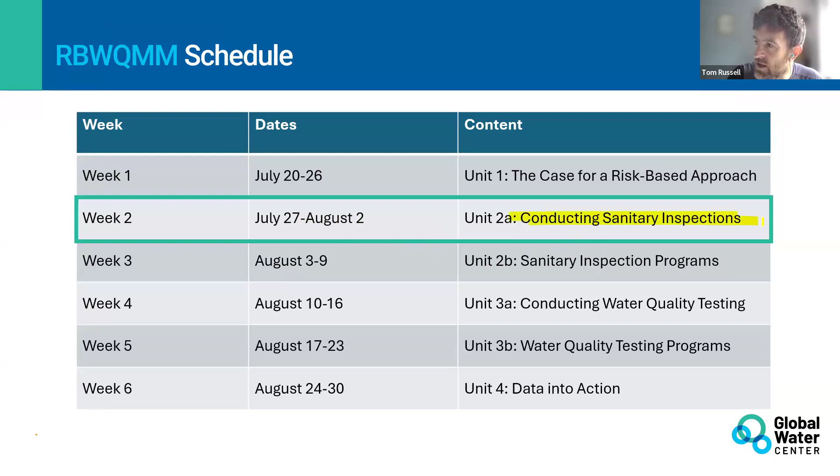Yeah, so, oh no, I need to get to the next slide. Thank you, Irene, for helping us through that. So today we are on week 2, as Irene explained, conducting sanitary inspections. So why do you think we started with that exercise?

Can anyone tell me, why do you think we started with that? We call it spot the difference. What do you call it, Irene?

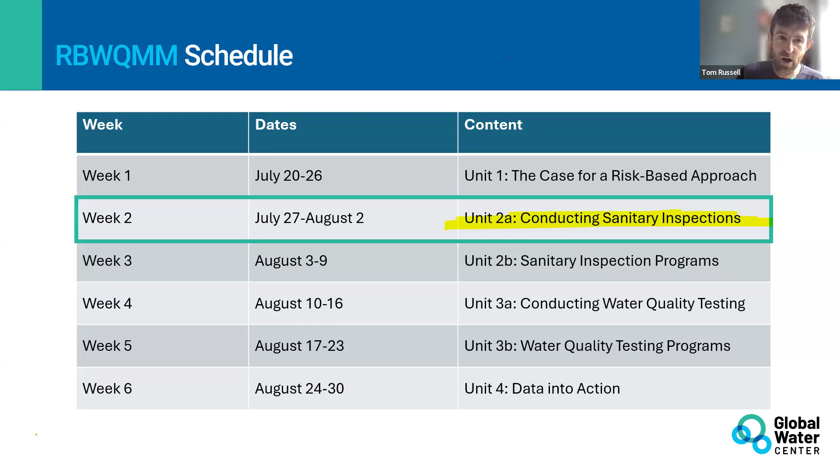So if you've been working through the course so far, you hopefully have reached Module 2. Module 2 has two parts, 2A and 2B. Both look at sanitary inspections. Today, we're looking at 2A, which is how do you do sanitary inspections?

Can anyone tell us by typing in the chat, or being brave? Yes, thank you, Emma. So Emma is telling us that a sanitary inspection is a systematic way to identify, score, and prioritize hazards around a water supply so you can prevent contamination before people get sick. I love that, that's fantastic.

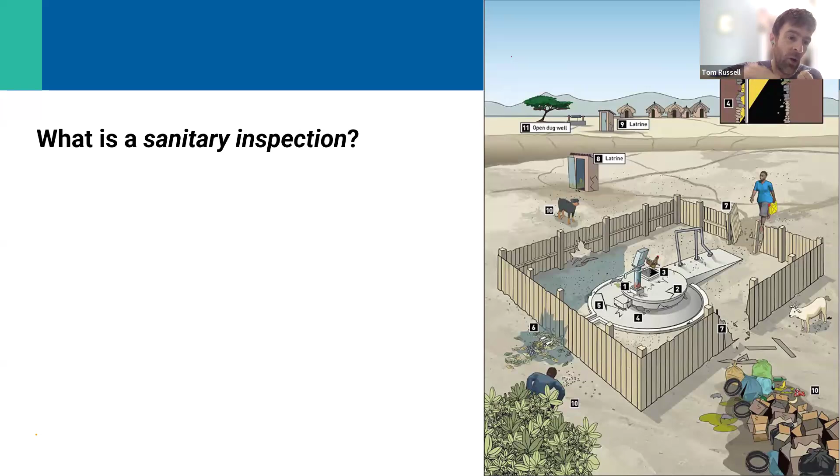That's right, as Emmanuel explains, it helps us identify risk factors. Thank you, risk factors. So I will show us the definition that you should probably find in the course. This is the course definition. It's always really helpful for us to think of our own definitions as well. And priority risk factors - that combines what Emmanuel and Emma have shared.

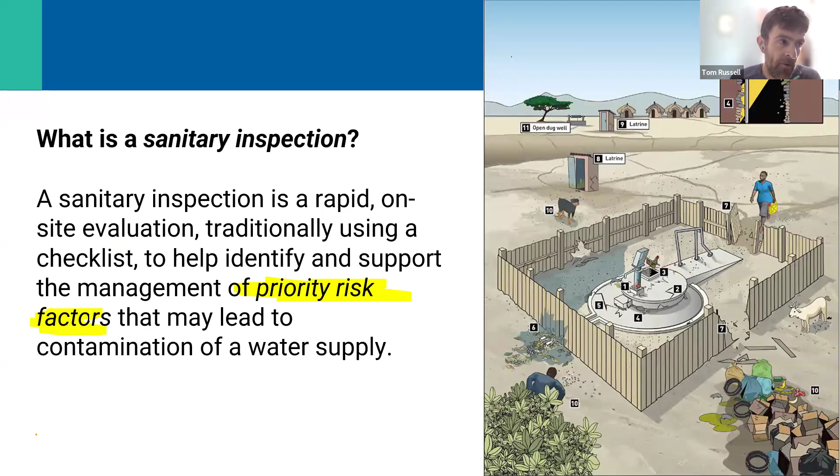My first question, I've got a few questions for us to begin with. Okay, we've done our sanitary inspection. Please do use your pens on the screen here. What do you notice? Are there any issues, any risks you see around this water point? If you can see some, use the pen again, like before, highlight them. Be great to see what you think.

My second question, what do we do once we identify these risk factors? So imagine that you've been to a site with your team, or your team have given you the results. You've got a whole list of risk factors. What do you do with that information?

So as Joshua says, it's a process to identify risks that could be risks to health, risks to hygiene, exactly. Mohammed, thank you, it's an on-site evaluation - yep, very important, it needs to be observed. It's an inspection, you do it at the water infrastructure sites. A standardized checklist - yep, it's a checklist, we'll see that in a minute. Actually, I can probably show you that straight away.

Let me show you an example. So don't worry Martin, I'm not taking over your slides - Martin is also leading us through this session today. Some people have drawn on the screen, great, I will come back to that. But it's a checklist, you'll see there are checklists that we work through. And if we go back to my first screen, here we go.

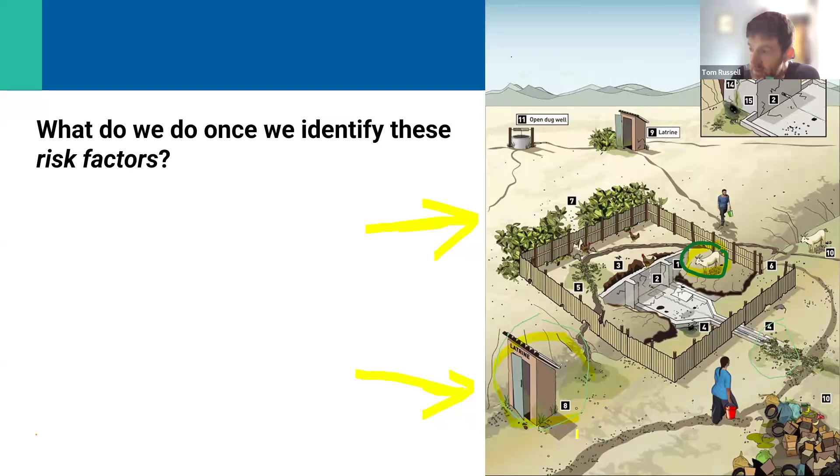Yes, someone's highlighted the goat who's inside, he's got through the barrier. A toilet latrine - now it depends, doesn't it? If that's a risk factor, why could that be a risk factor? Perhaps the person who highlighted the toilet latrine can tell us. Oh, somebody's also highlighted some clogging up of what looks like the drainage. What could that be an issue? How could that cause contamination and health concerns?

So what do we do once we identify these risk factors? Well, as you can see from the definition, the textbook definition from the screen, doing this helps us identify corrective actions. So if you look at the right-hand side, we can see - there are animals getting inside, so we need to do something. So the purpose of these assessments is to identify what the risks are and what actions we need to do as a response to help ensure that water is safe.

I'm going to ask, great, those chickens again, sneaking in - I saw them last week as well. They're still there, there's another one here. Wow, I didn't realize there's so many chickens on this screen. It shows it's important to be attentive.

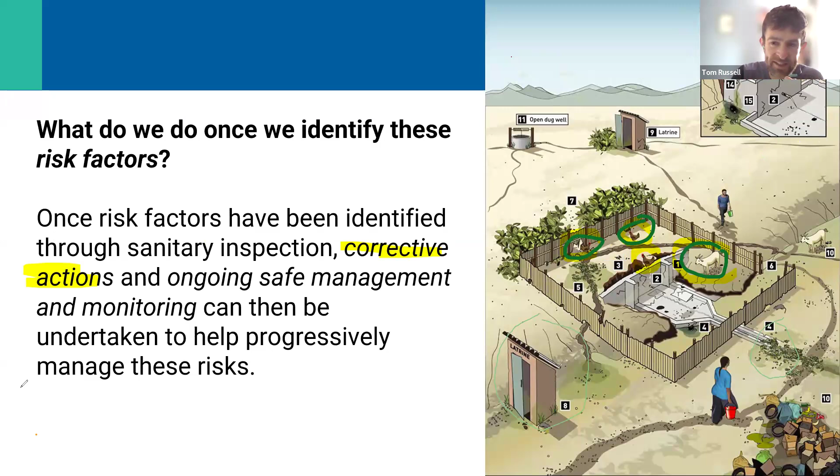Apologies, we're going to say goodbye to the current set of drawings, but please do add on more drawings during the session. We wanted to ask the next question: who here has experience doing a sanitary inspection?

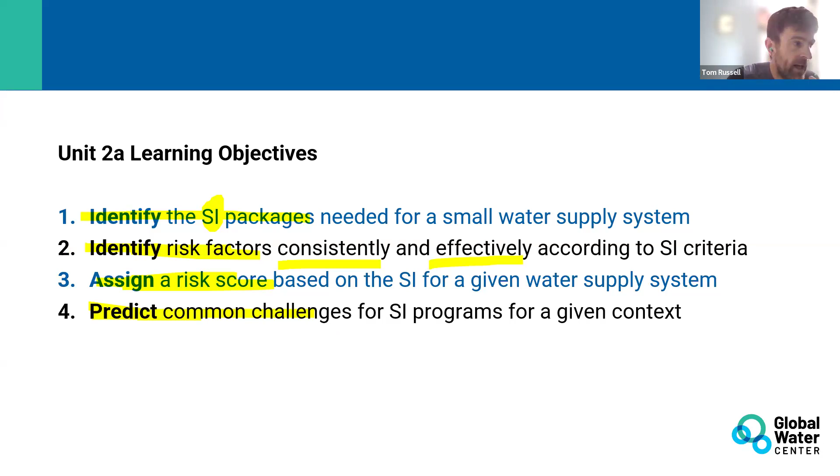So during this course, we are using the World Health Organization - they have standard sanitary inspections. So we're using the set of standard sanitary inspections from the World Health Organization. So what are the different types of infrastructure for which there are sanitary inspections in the WHO forms? What are the different types of infrastructure?

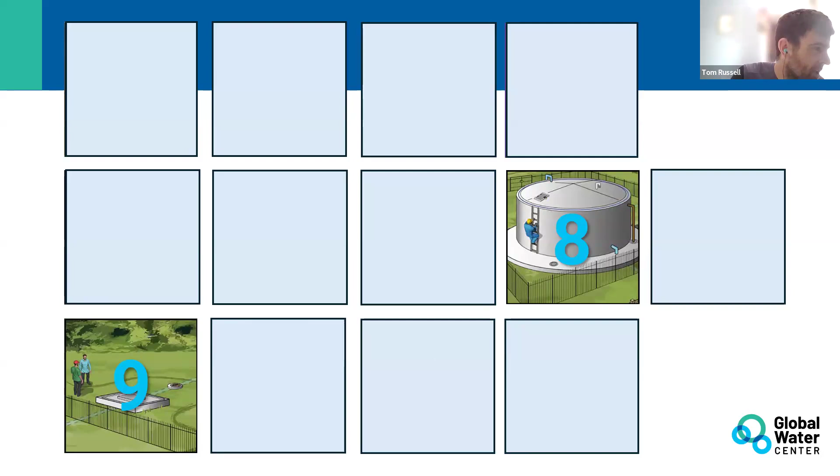Springs, thank you Gabrielle. Let's see if I've got a spring on here. Let's have a look, yes I do. Number 3 is a protected spring. Excellent. We've got pumps. Oh yes.

So we've got borehole. Now how do we get water out of a borehole? Is it the same form for any type of borehole, or are there different forms for different types of borehole? Question for those people who borehole.

Now domestic points has been mentioned. What do you mean by domestic points? Clarify that, that'd be helpful because there are a few different things.

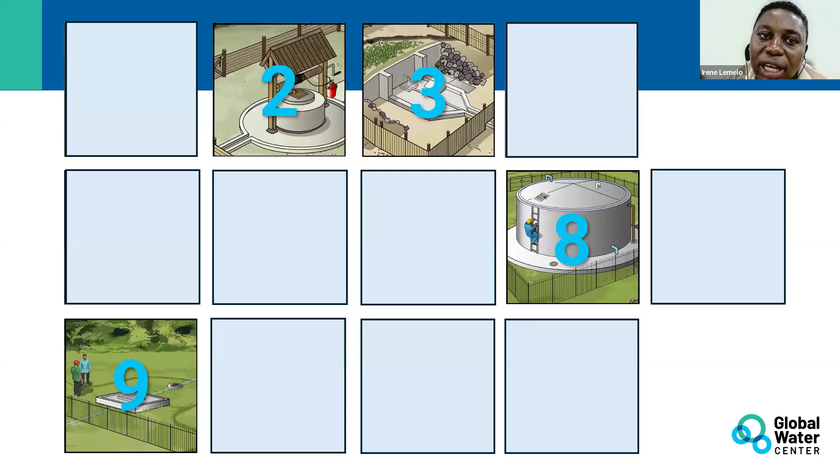Protected dug wells. Yes. When they say domestic point, do they mean kiosk or water point? Oh, they're 2 different things there, Irene. Good, that's good to know.

We've got protected dug well. Fantastic, okay, we've got water kiosks. So water kiosk is number 12, where people come to collect water. Somebody mentioned, is it like a tap stand? Is that what you mean? Number 10, a communal tap stand. So is that the difference you're referring to, Irene?

Yep, it's the same, for us how we use it, the same. So we have the same word, domestic point, but different forms. And this is really helpful to understand for our context.

Now boreholes, we have boreholes mentioned, but is it the same form for every borehole? Protected dug wells, yes, that's number 2, protected dug wells. How do we get water from the borehole? Are there different ways that we can get water from the borehole?

Oh, make sure everyone's coming in. If you're just joining the call, welcome. Rainwater harvesting systems, fantastic, we're looking at the different sanitary inspection packages.

We've just had Hamza mention rainwater harvesting system. So number 6, you can see it clearly, you've got a reservoir with a tap, and it's connected to a rainwater harvesting system. Fantastic, what other water infrastructure?

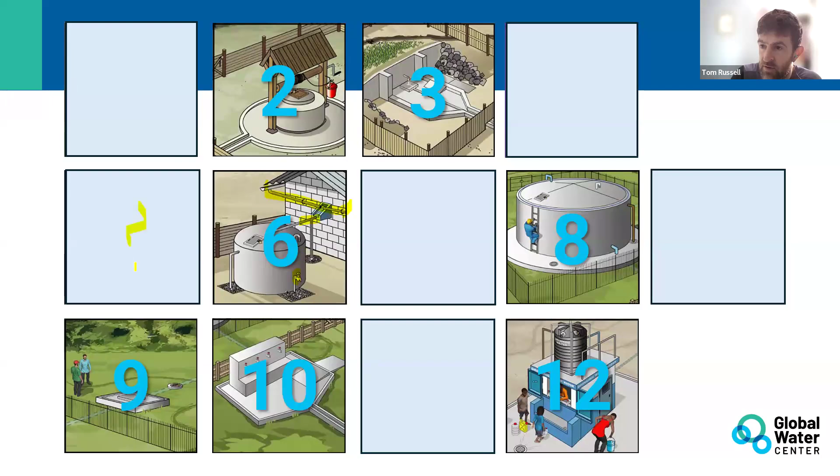So we've still got 1, 2, those infrastructure items we've got 6 to identify.

Now, at least one of those is storage facilities. Where?

Drainage channel, I'd say yes, drainage channel is an important component, but I'd say it's part of the infrastructure rather than the infrastructure itself. But you'll notice it should be in every one of the HP. Please do let us know, HP, if that's your initials.

Home storage facilities, exactly. How we store water in the home is a key part of the water supply process. It doesn't stop at the tap where people collect water, also water storage in the home as well. Now somebody, yes, like drums, exactly. So we can see a jerry can here, different water collection facilities.

Somebody had mentioned, so we've got treatment plants. It's not mentioned, or is it mentioned here? I don't know if it is. What's number 5? What's treatment number 5? Facilities, it's not mentioned here. So that's a good point. I don't know if the WHO have one for water treatment plants, but that's a really good point.

I will have a look after this call and check. We also had, let me have a look, intakes, I think somebody mentioned. So number 7 here in the middle, this is an intake if you've got water coming from a river. That's part of your infrastructure.

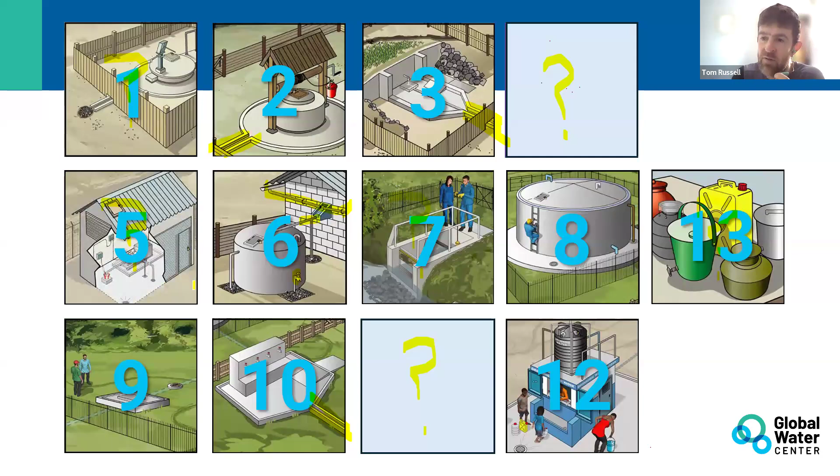Now just to wrap up, we did have a borehole mentioned, so we've got borehole with a hand pump, and then borehole with, somebody did mention solar power. So here's a borehole with a submersible pump that's powered either by the grid, generator, or by solar. We've got 2 more here, let's see if we can think of those. So what is the top hand one?

Now I'm going to reveal them. I'm not too sure actually how this differs from number 1. Can anybody tell me? We've got number 1, number 4. They look very similar to me. Wonder what the difference is.

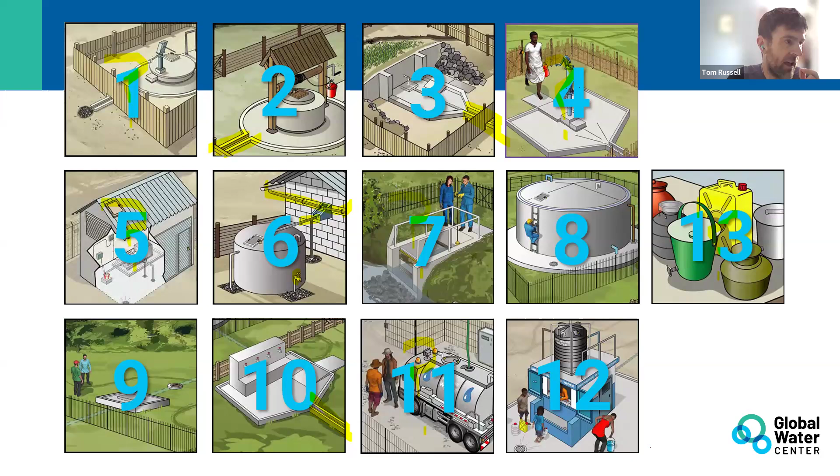And then we've got number 11, which is water tankering, another method of providing water, another stage of supplying water to people. So these are all the 13 different infrastructure for which you can find sanitary inspection forms in the WHO World Health Organization book, which is our key resource for this course. So do have a look and see.

My question now is, is there anything missing from this list? So think about your water supply systems, where you work. Is there any infrastructure for which you do not see a form?

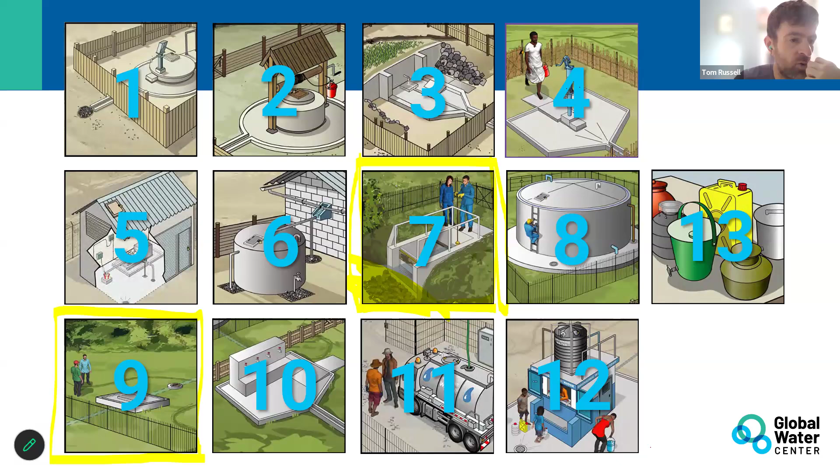Great, so those are the different inspection forms we have. And now we're going to dive in and have a look at some of these. Now Martin, are you... Oh yeah, I was going to show just briefly what's included, and then Martin, you're going to talk us through how to use them.

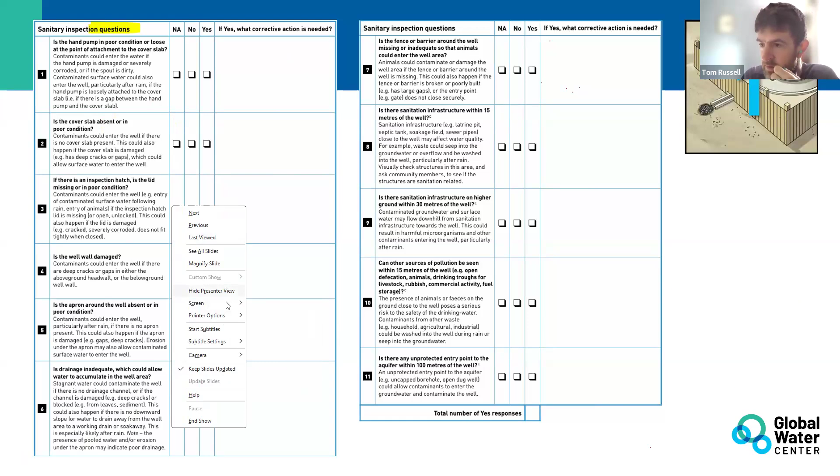So when you go to the form, now this is quite small, but what you'll see, there are questions. Now if you've got anything you want to ask about how we fill in this form, now is the opportunity. We're going to have a go as a group to fill in some forms using some images on the screen, but first I'll talk you through. Let me see if I can get a zoom on my Zoom. Because it's quite small, isn't it? Where's my Zoom? Oh no, I think I know where it is. Bear with me, magnify slide. Here we go, great.

So you'll see there are several questions we need to ask. So when we approach our infrastructure, we ask, for example, for a hand pump: is the hand pump in poor condition or loose at the point of attachment to the cover slab? So if we were to pick up a little example...

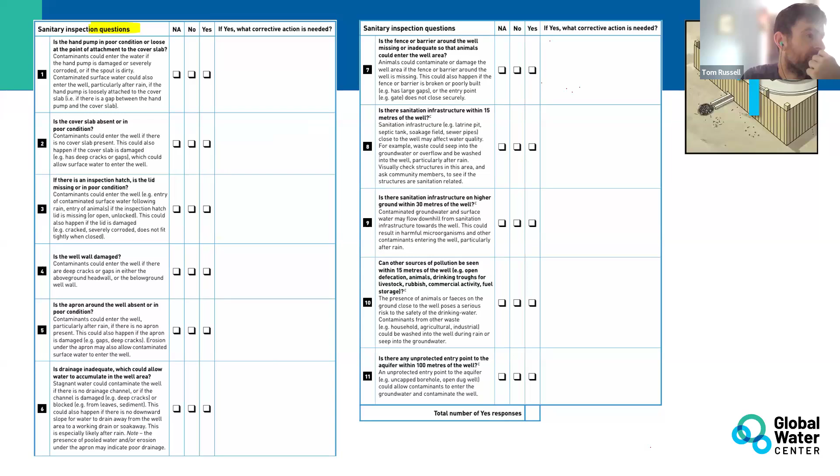Let me see, okay, we're going to jump into this, but we won't take all this from you, Martin, don't worry. So what do we think? Is it loose? Is it loose at the base? Looks pretty solid to me. So that's our first question.

So if we think no, it's solid, there are no issues to worry about, then in our form, if I use the zoom function again, magnify slide, here we go. So here we could say, is the hand pump in poor condition or loose? I'd say no. No means not a problem. If it was yes, it is a problem, then here we can describe what do we need to do to make it better, to improve the situation.

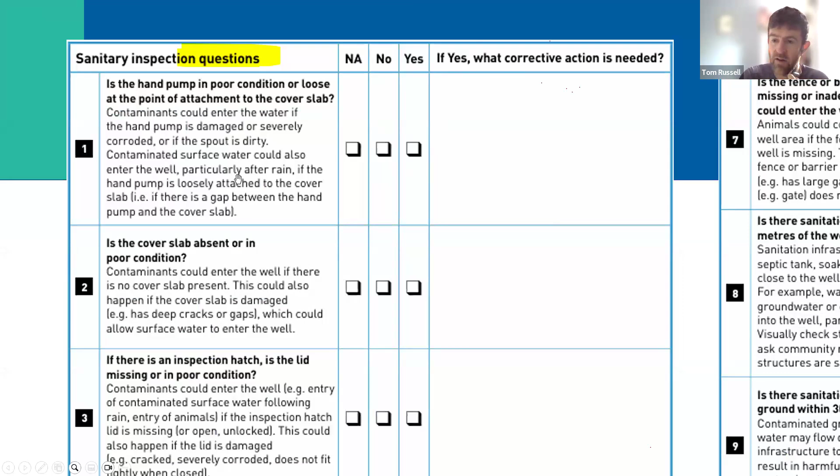What corrective action is needed? So that's the process: we take the questions. I think there are 11 questions here. We answer each question. If it's a yes, we say what we think should be done. Then we total the number of yes responses. As Emma or Emmanuel said at the start, there's a risk score - that's the total number at the end. So the maximum we could have is 11 for this one.

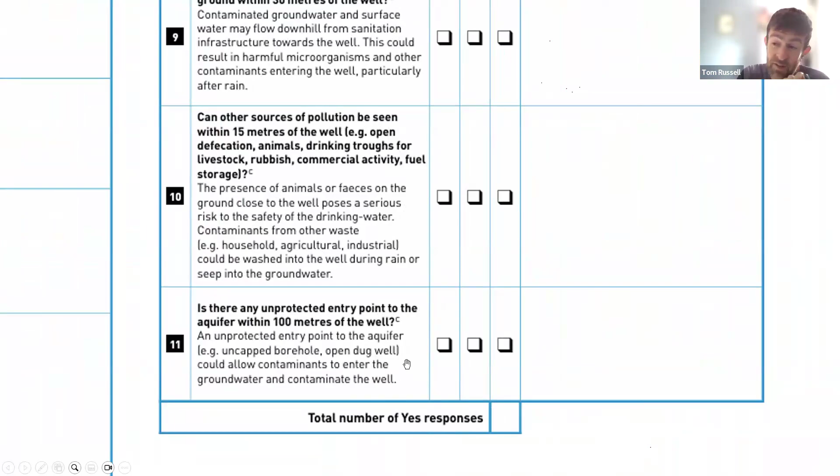So this one is the first sanitary inspection form for a hand pump over a dug well. That's how the form works, very briefly.

In a moment, Martin is going to talk us through how that works. Martin, are you ready to share your screen? Yes, I'm ready. Fantastic. So I will hand over to Martin to take us through some examples together using the sanitary inspection form for water supply infrastructure, hopefully matching what you see in your context. Martin, please go ahead in Swahili, English, or both. And off we go.

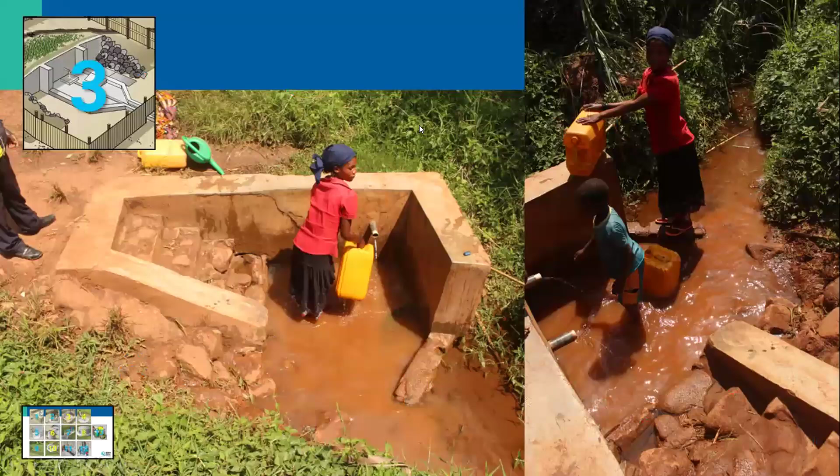So if you look at the photos shown, what are the risky factors that you can identify on the photos?

You can type your answers in the chat, but if you want to speak, raise your hand and I will unmute you. You can also type in the chat, or use the pen on your left-hand side, as we learned earlier, to mark the risk factor you see on the particular element shown.

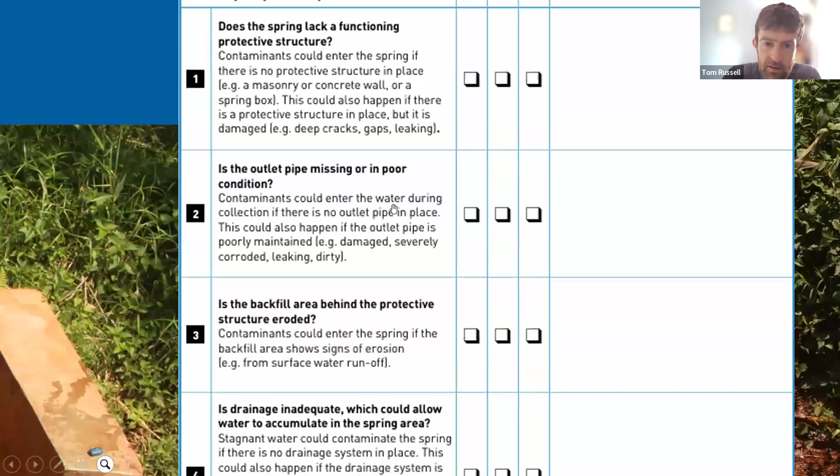Yeah, you can, or I can zoom in. If you zoom in, you can do it in the slide deck. Magnify slides, correct, perfect. And then click on the slide. Yes, and then click there. You have to, yes, perfect. Now it's great, it's clear.

Okay, so maybe we can go about one by one to see if that is the risky factor to that water point or not. So number one, does the spring lack a functioning protective structure? On your observation, do you think that is lacking in that water source, point source?

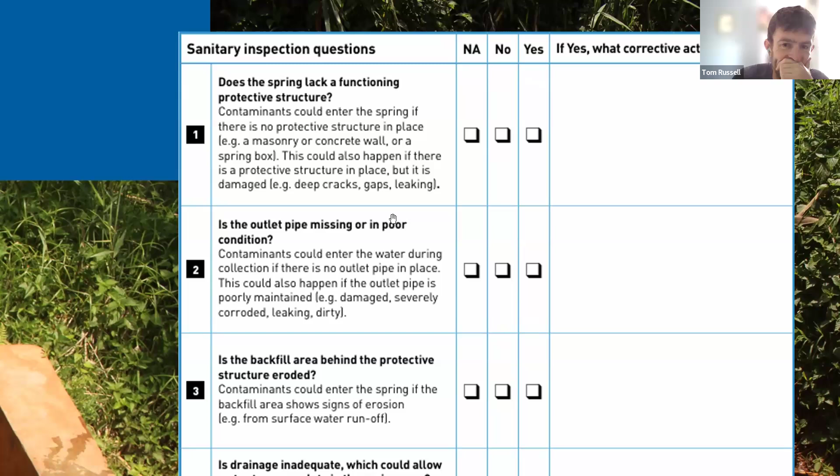If yes, you can type yes. If no, you can type no. If not applicable, you can type not applicable. And use the pen to check on the boxes.

Got a lot of yes in the response. Is this for number one? Yes, number one. Okay, so thank you very much. So yeah, majority, maybe all those who responded are saying the water point doesn't have the functional protective structure.

If you look on the photo, it is a spring, but it's not protected. So the form is trying to highlight that contaminants can enter the spring if there is no protective structure in place. So we need to construct maybe a spring box to make sure the spring is well protected from surface runoff, so animals cannot easily access and contaminate the water that we are using.

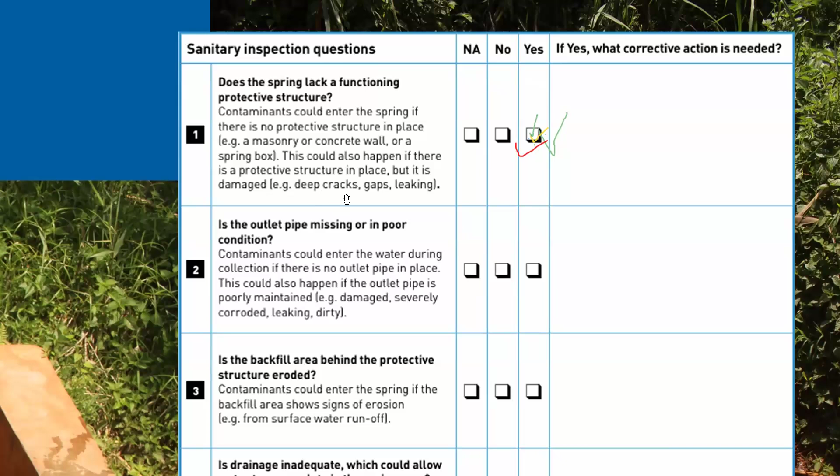Number two, is the outlet pipe missing or in poor condition? The way you see in the photos, is the outlet pipe missing or in poor condition?

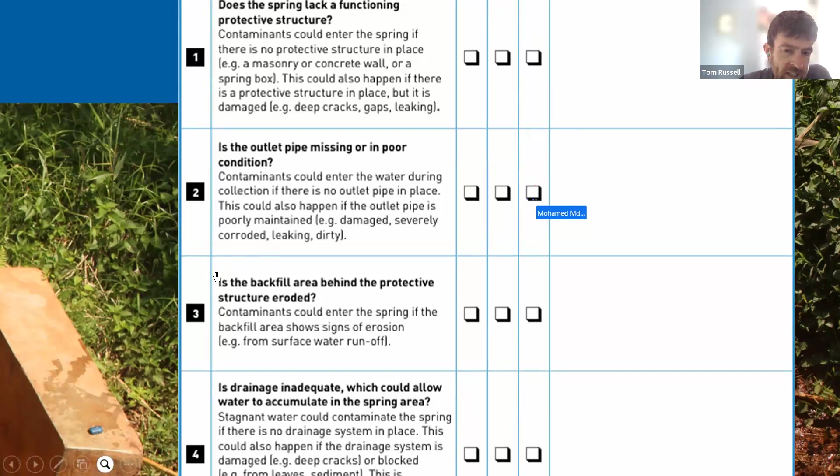Oh, should we go back to the photo? If you zoom out again, if you click on the screen, it should go back to the full screen.

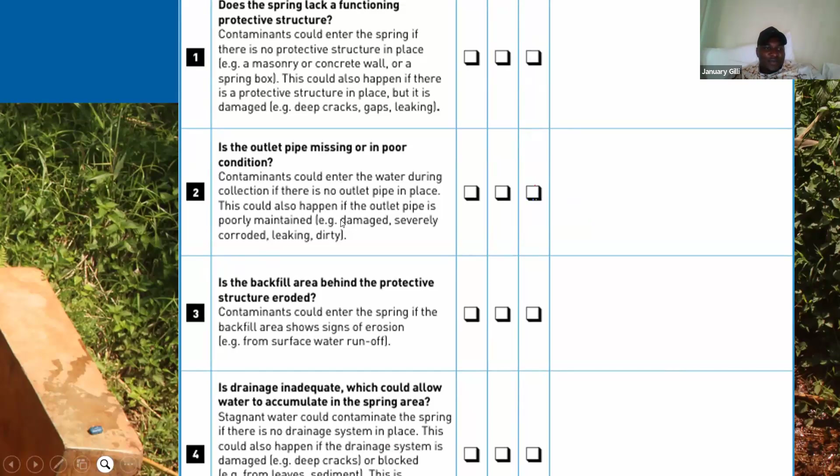Okay, can you see the full screen now? Yes, we can see the full screen. Are you able? Yes, okay, we can. So we have three options. Number one is not applicable, NA means not applicable. Number two is no, and number three is yes. So you have to check the respective box.

Got you. So let's look on the photos. Look on the photo now, and then we'll zoom out to be able to read. Okay, so question number 2 is saying, sorry.

Okay, that's right. So there are 11 questions for this inspection form, so not all of these questions will apply. So if the question doesn't apply, exactly, you put NA, not applicable.

Yeah, cool, thank you Tom. So number 2 is saying, is the outlet pipe missing or in poor condition? So you have to check whether it's not applicable. Not all these conditions are applicable to that particular photo, so sometimes you can find that particular component is not applicable, you have to check the box of not applicable. If it is yes, you check yes. If it is no, you check no. So I'll zoom out again.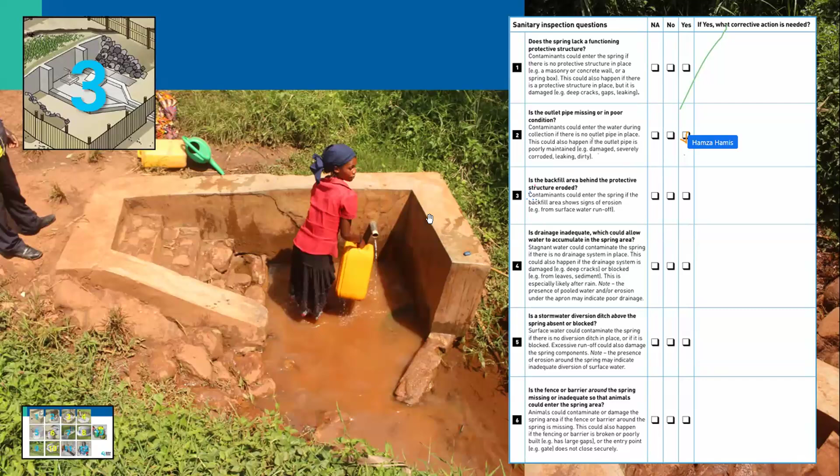Can you check the box? Which box is correct for this number 2? So in the chat, we've got people saying that it's in poor condition.

It's not missing, yes, but it is in poor condition. Okay.

Yeah, okay, thank you. So you can check, for instance, you find maybe it's not missing, it is there, but it is in poor condition. So you also have an opportunity to give comments on the last column.

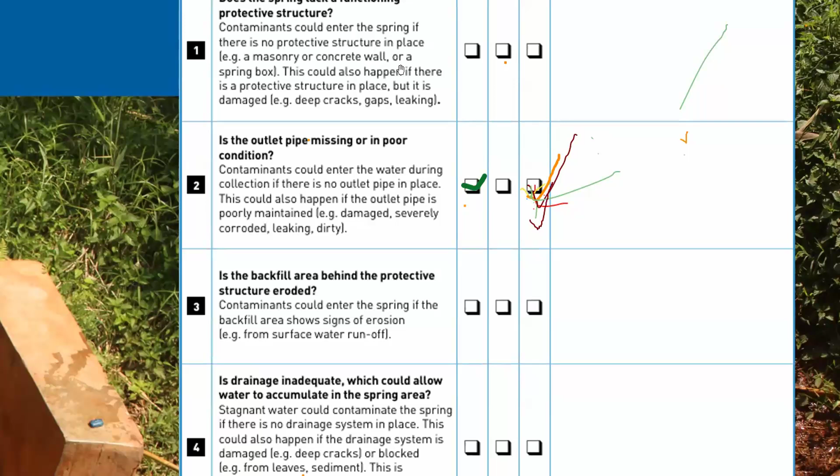Yes, so the question is, Tom, if you can repeat. So somebody put not applicable. So do we think that the outlet pipe, what is the outlet pipe for a spring? Do we have the same understanding of what an outlet pipe is?

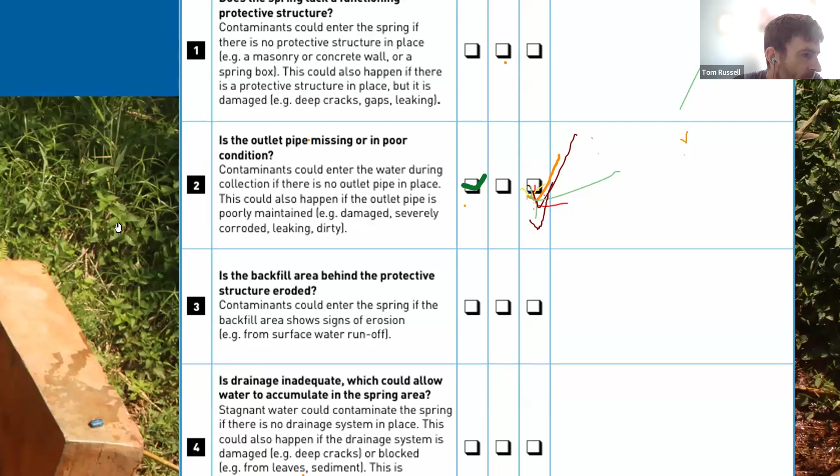Okay, so if I go back to the photo, this is a spring. In this context, we mean the pipe that water is flowing through, because we cannot see the spring itself, but through the pipe we see water flowing. So this pipe connects the spring and the point where people can access water. Super, thank you for clarifying, Martin.

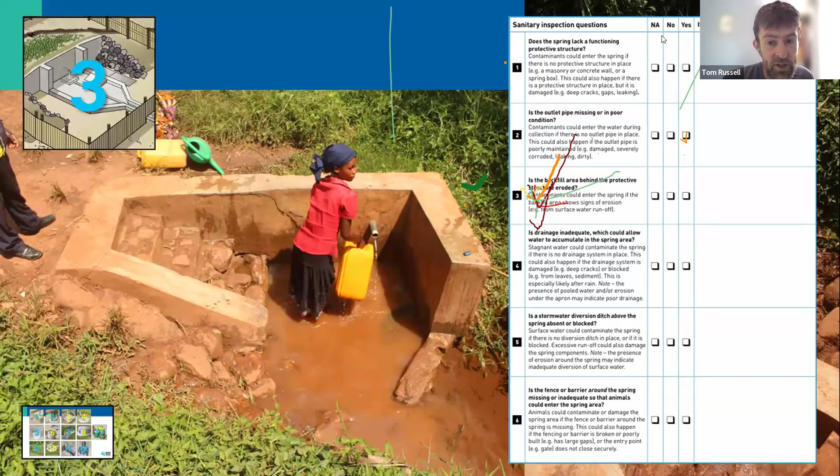So you'll notice that I posted in the chat a definition that I took from the sanitary inspections form. If there are any questions about definitions, what does this mean, the form itself has a section which describes each of these components in more detail. This is just one part of the form, the questions, which is what we use, but if there are any queries, there is more explanation.

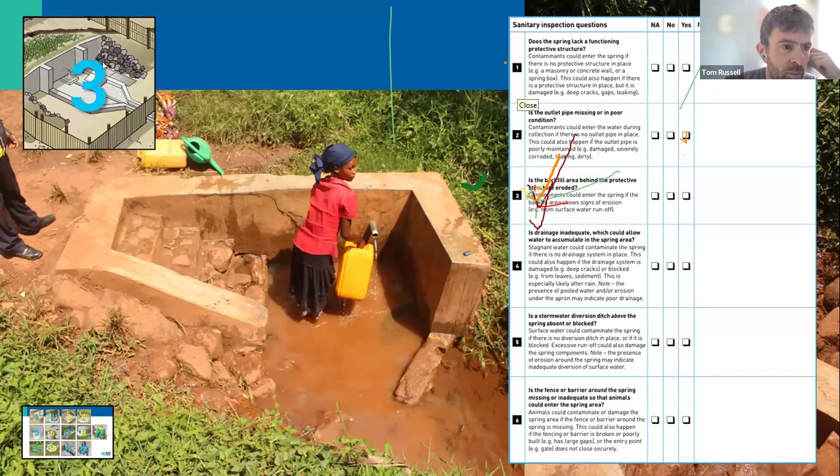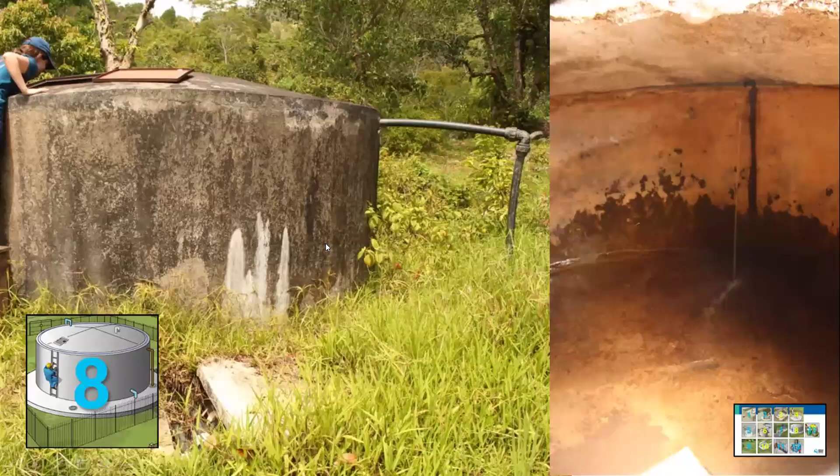Thank you, Martin. Should we have a look at a different infrastructure? I think many people put number 8. Yes, let's go back and check number 8. Okay, yeah, so this is a reservoir storage tank kind of.

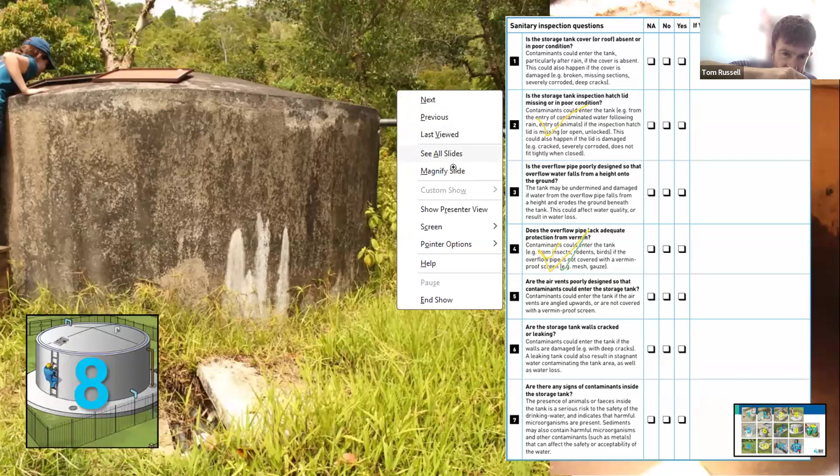I think the form is suggesting number 1 is for the cover, the roof, and number 2 is just the inspection hatch - that small opening where someone can have a look inside. So number 1 is the entire roof, and number 2 is the inspection hatch. Perhaps a reservoir will have a roof but no inspection hatch.

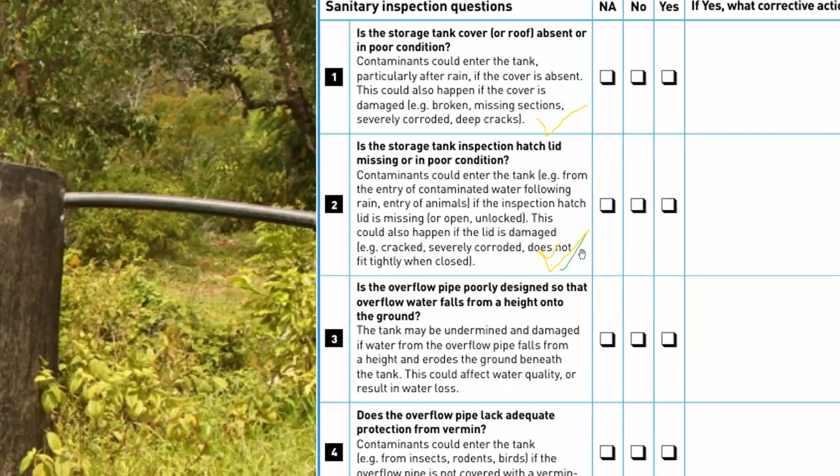Majority say yes, we have checked - yes means the storage tank inspection hatch lid is missing or in poor condition.

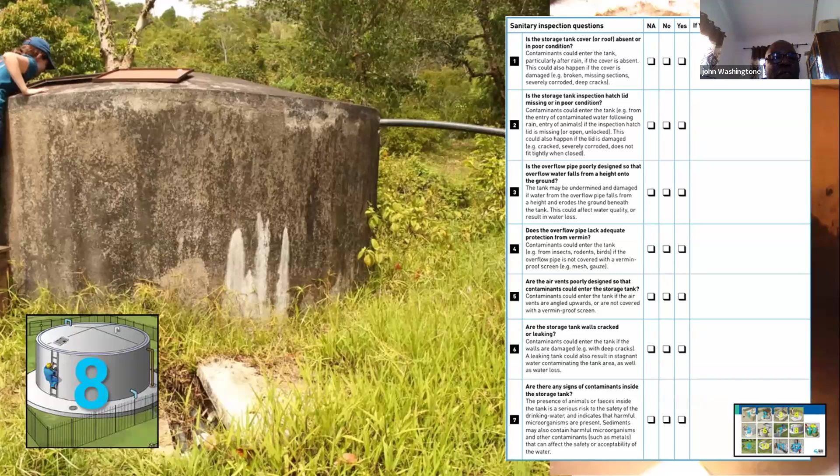Thank you so much brother John. And in general, that is why we are here - make sure we are all doing the good job, but make sure the place that you are working, at your project that you are managing or overseeing, make sure the infrastructures are in a good condition, not the way this tank is - it seems like it has been abandoned.

Through this checklist, you will be reminding yourself whether the infrastructure is in good condition and free from any contamination or not. And if you see there is any sign of contamination through the particular infrastructure, you take the relevant action before the situation becomes worse.

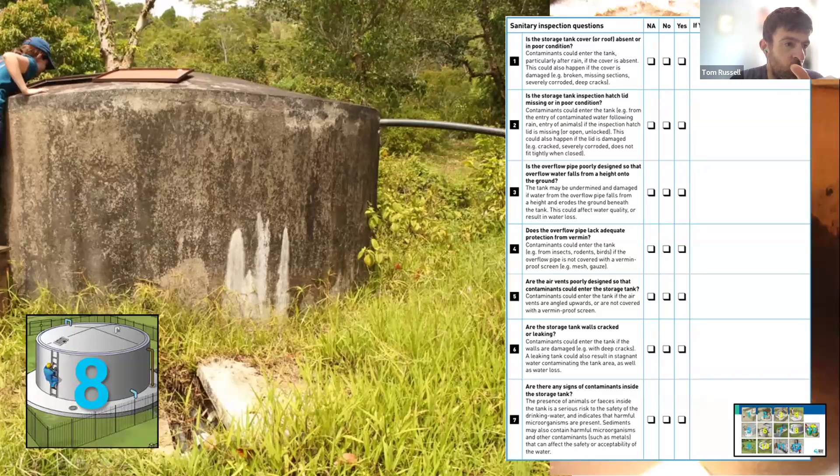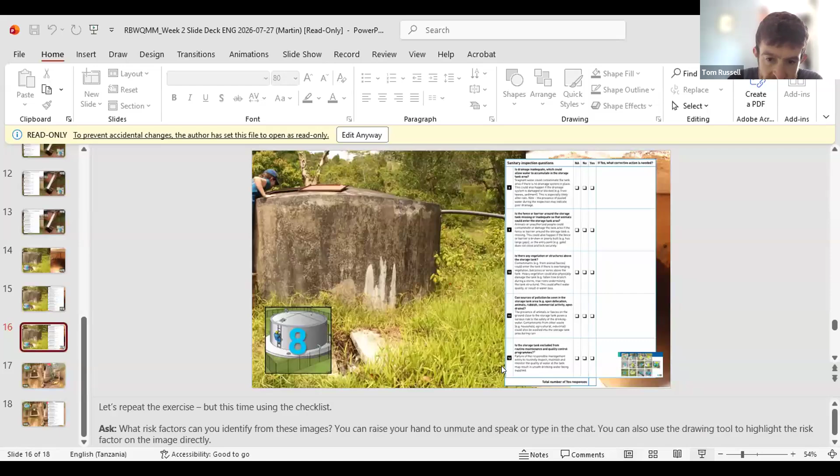I also wanted us to pause to see if there are any questions about this part of the course. Let me share my screen. Are there any questions about this part of the course? We've been looking at sanitary inspections before we move on, and then John, I think you've prepared a quiz for us to wrap up this session.

Thank you so much, Martin. Round of applause for Martin in the chat. Really helpful exercise, and I hope that's helped us appreciate that there's a lot to think about when it comes to sanitary inspections, and it's good to do it together as a group. Like the opening activity, not everyone sees everything, and coming together helps us see everything that could be an issue. So if you've got any general questions about the course content, please do raise your hand or type them in the chat.

But now, John, you've prepared a quiz for us, I believe. I can control it, so it's quiz time. Now, quiz means points, I'm not sure if points means prizes, but how it works is we've got two sections to this quiz. On the left-hand side, we've got 5 questions about the process of doing sanitary inspections, and on the right-hand side, we've got questions about the challenges. You can see there are points from 100 up to 500. You can win points for your group. We'll keep track of different groups. You'll notice you are in a group of, say, 30 people when you join the platform, but as you can see today, we have more than 30 people doing this course.

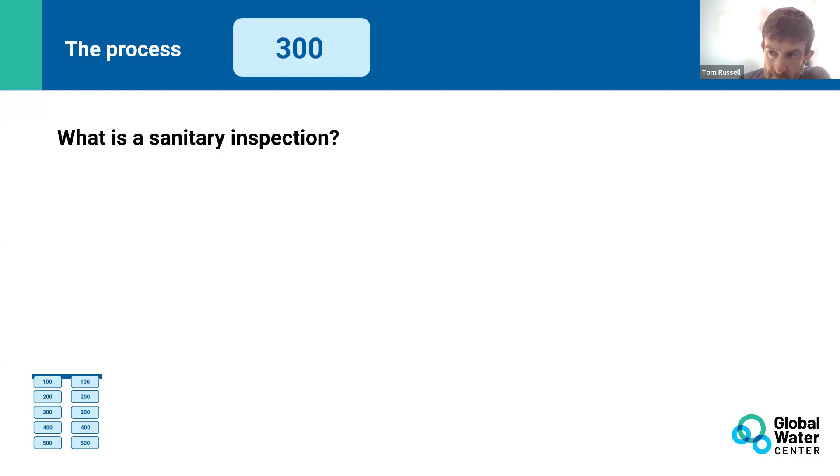Okay, Tom, yep, he has put it this way: Sanitary inspection, it's a way of conducting infrastructure inspections to identify the root causes which may lead to water contamination. Great, I'm going to put up our summary here and use my highlighter. Thank you so much, Emmanuel.

Yes, so we use a sanitary inspection to identify risk factors that may lead to contamination. So maybe just to clarify, that 'may lead' - so we're not sure if it will lead to contamination, but we think it might do. So I'm going to give Emmanuel and Team 5, not that I'm biased, 300 points. Right, who's next?

Next question, John. Thank you. We had somebody in chat by the name of Quality. Quality Store kwenye chat unaweza ukazungumza.

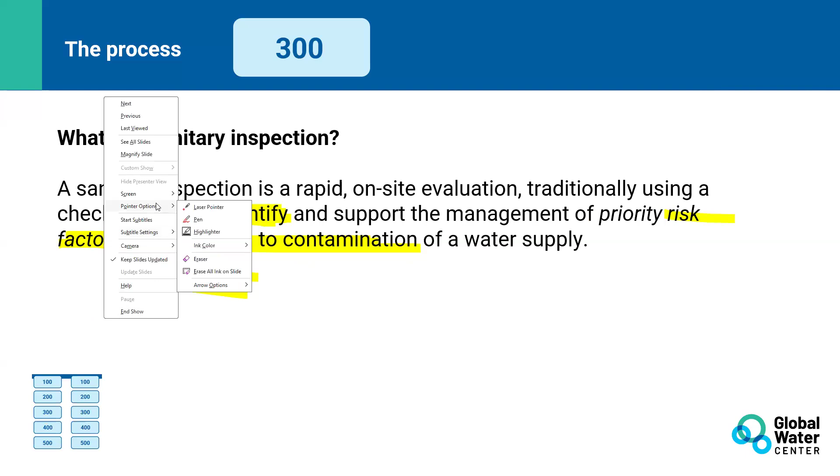He has selected 200. Which side? Sanitary, which side is that - process or on the right, challenges, or on the left? Hiyo 200 ni kushoto ama kulia? Quality store. Well, quiet. I'm going to choose for quality store. We've got a new question.

Okay, hiyo ni kushoto kwangu kama nimekaa hapa. Aha, that 200 is on the left. Well, I've chosen the one on the right. So we're going to mix it up, making it a little bit harder, because I think quality store you would get the other question very easily. So I'm making it a little bit harder.

Do tell us your name. Sasa una bahati, umepata swali la kulia. Karibu. Can you give us a list of two things that could happen if uncertain conditions are consistently marked as 'no risk'?

It's a harder question. If you tell us your name we'll tell you what group you're in, and then you can ask for other people from your group to help. Ukitajia jina lako halisi, Quality Store, tutakwambia huko kwenye grupu gani, alafu na kwenye grupu lako unaweza ukapata usaidizi kwenye kujibu hili swali.

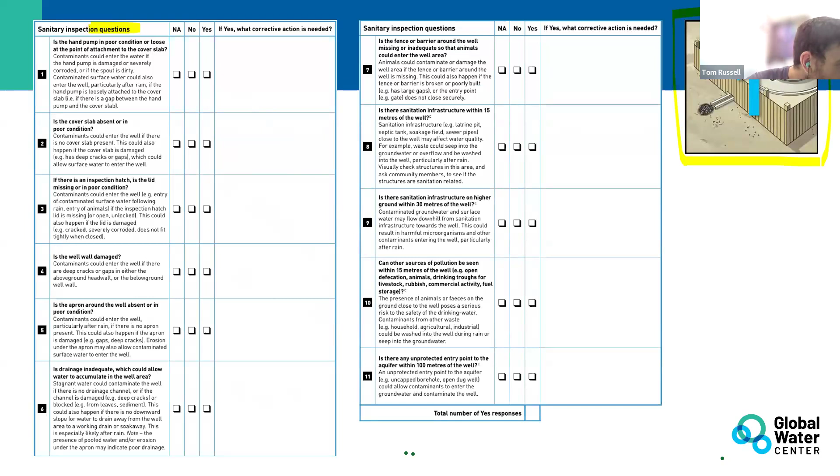But have a think. When we were looking at this earlier, let's just look at this for a second. So I'll go back to this, this might help. The question is, if we do an assessment and we put no, no, no, no, no, no, no - so it says, if uncertain conditions are marked no...

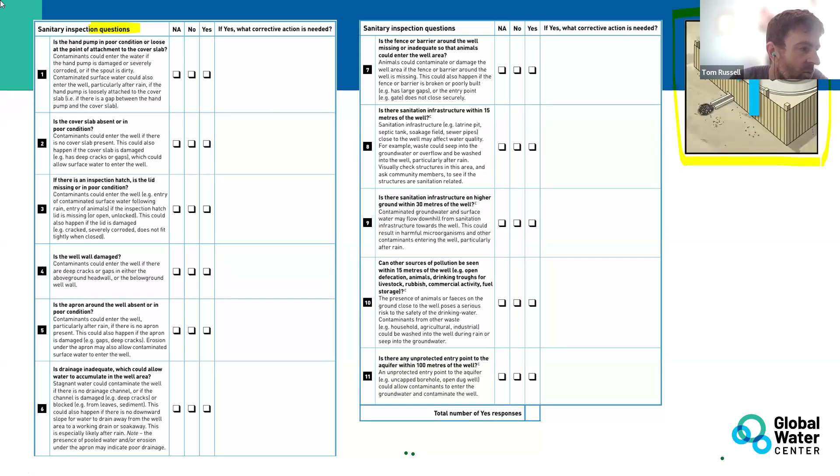So if we're not sure - we haven't talked about this yet, but if we're not sure, we had some discussion earlier with Martin where we had different opinions slightly. If we're not sure, if it's a maybe, do we put no or do we put yes? And if we put no, what's the risk? Aha, Gabrielle has jumped in on the chat looking to steal the point. Sorry Wilfred, John, over to you.

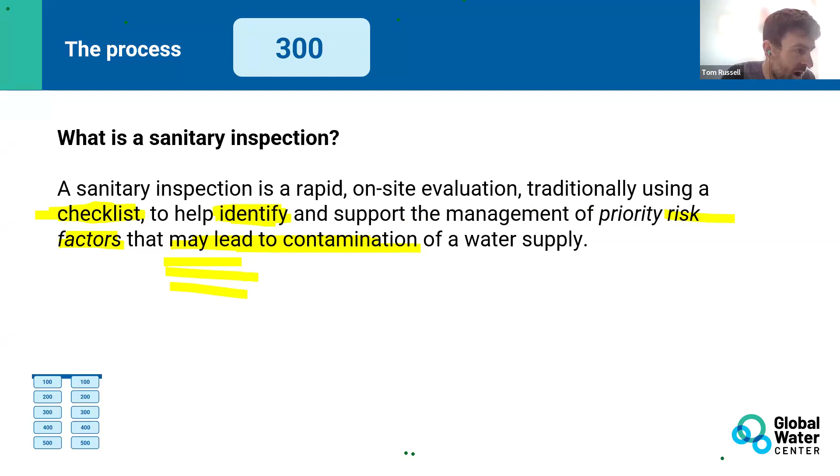If we're marking no because we're not sure, we're uncertain, we put, well, I'm not sure, I'm going to put no. Why might potential health risks be missed? If we're not sure and we put no, can anybody else explain what might be missed? Like Gabrielle said, I think you're right, Gabrielle, but why? John, over to you.

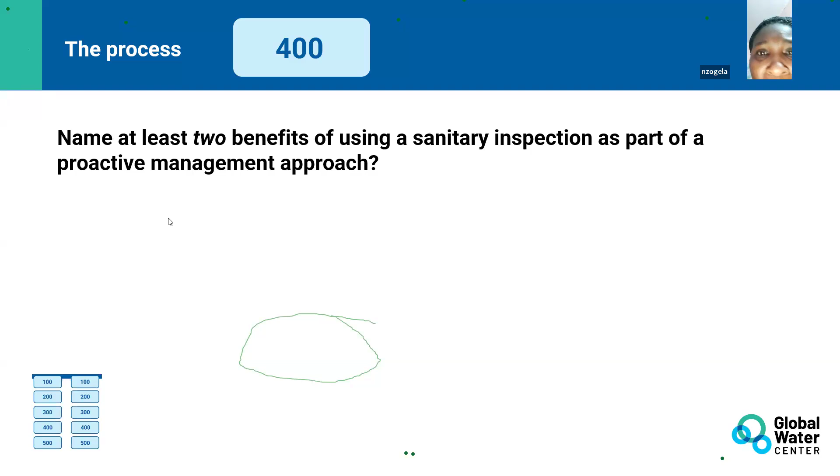earlier information about the hazards or about the risks before it happens. Because when you do the sanitary inspection, you can notice the risks or contamination of water before it happens. So the benefit is to get you well prepared. As it shows, it's a proactive management approach. It means before the situation happens, you have already understood what's going to happen, so you can correct it before it happens.

That's the first benefit. And also, it can be the second point, it can help to reduce.

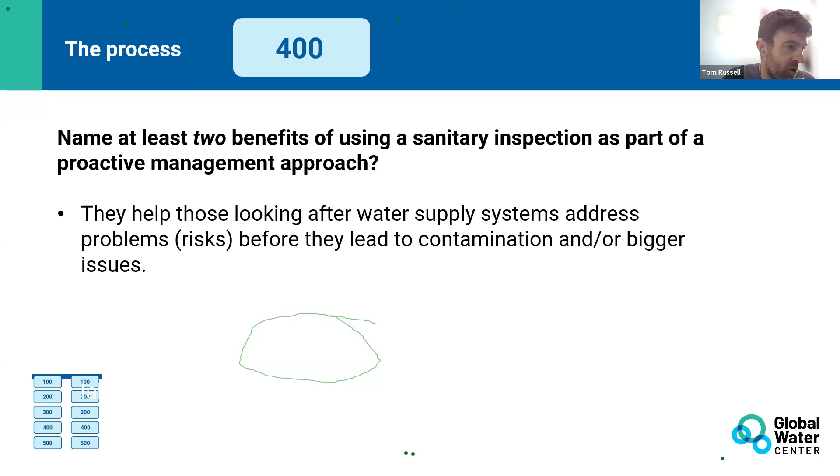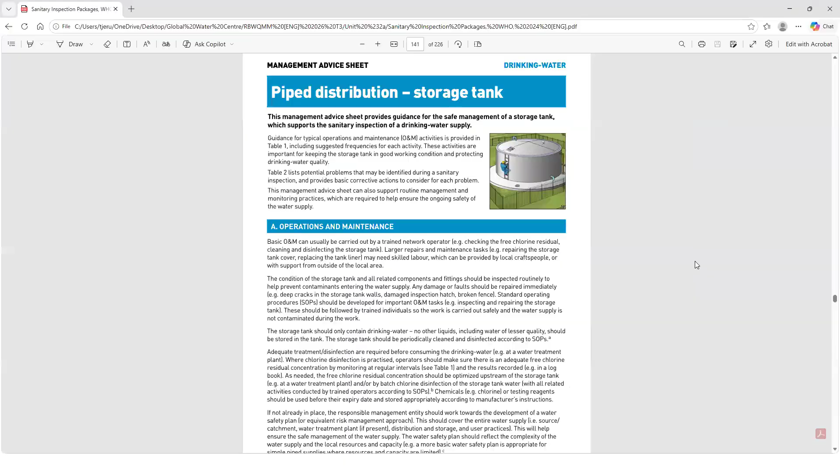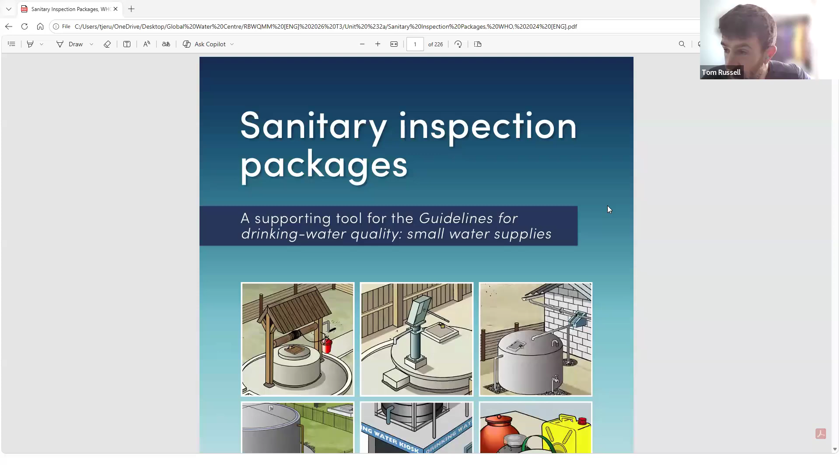Just before we all finish and leave, really important, any questions you have, study this guide, the sanitary inspection package. I know Hamza was asking what information should be recorded during a sanitary inspection, and why it's important to document that accurately. So we just really scratched the surface.

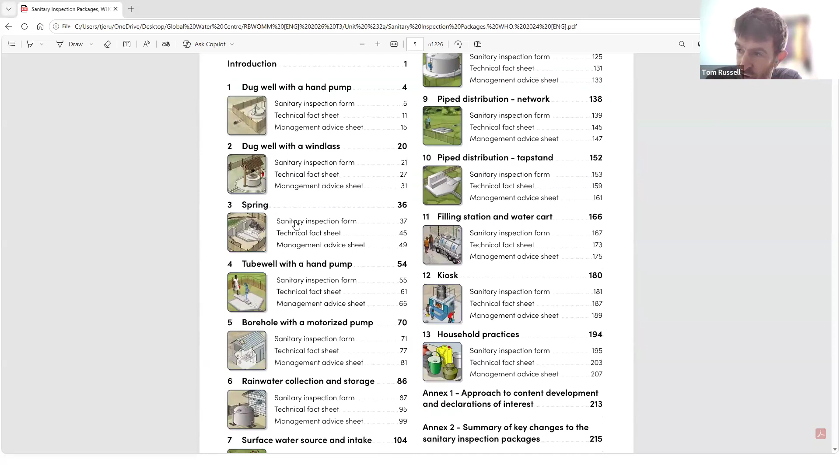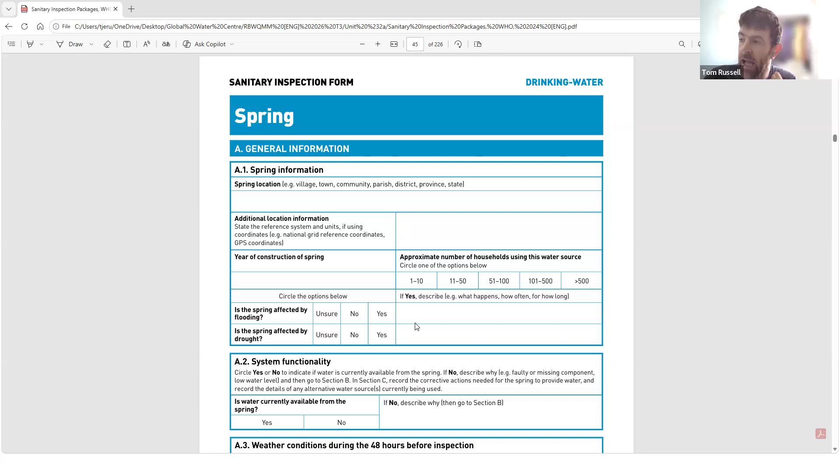So if we go back to one of these, let's have a look at spring. So in each section, for each water supply infrastructure point, part of the system, it's not just the checklist form. There's also some general information about how old is the spring, how many people are using it, is it affected by flooding, how well is it working, what was the weather like over the last 2 days before, is there any treatment that's being taken place?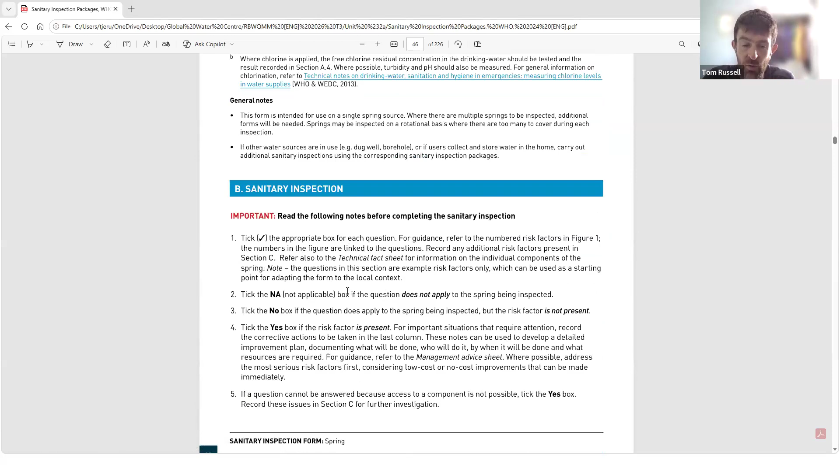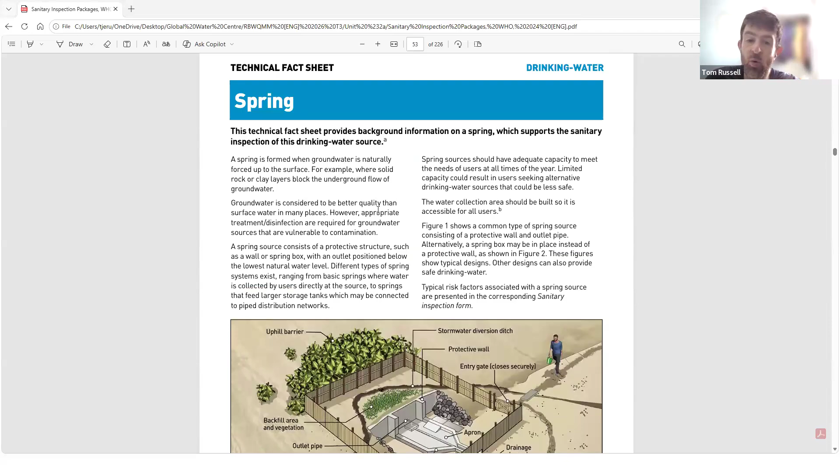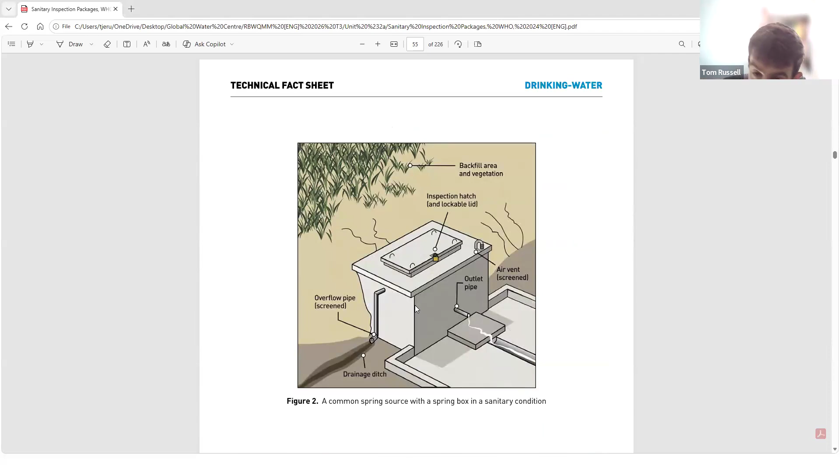So there's all of this information to guide you through the process. There's the sanitary inspection form, and the numbers here match the numbers in the form. And then as well as the checklist, you scroll down, you'll also see a technical fact sheet which will describe to you all the different parts of the spring, of the technology. So when I had that question earlier about outlet pipe, this is where I found that information. And then also there is this more detailed one, if there's a spring box, if there's slight differences to the system. So do study this fact sheet as well.

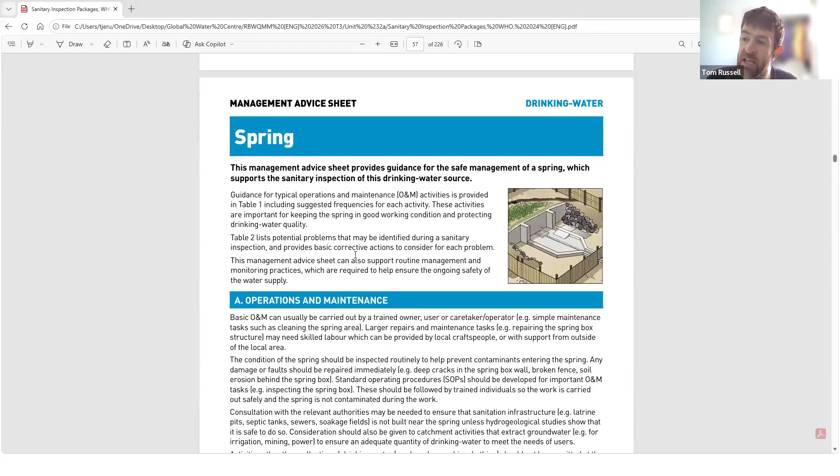And then there's also some advice on what you can do next. So next week we'll be looking more at what we do once we see issues, so how to look after the spring, operation maintenance, advice sheet. So yeah, we do encourage you to study the packages. It's not just the checklist, there's so much more to it, and we do encourage you to study those through the course. Any questions, don't hesitate to reach out to us, myself, John, Martin, Irene, through the platform.

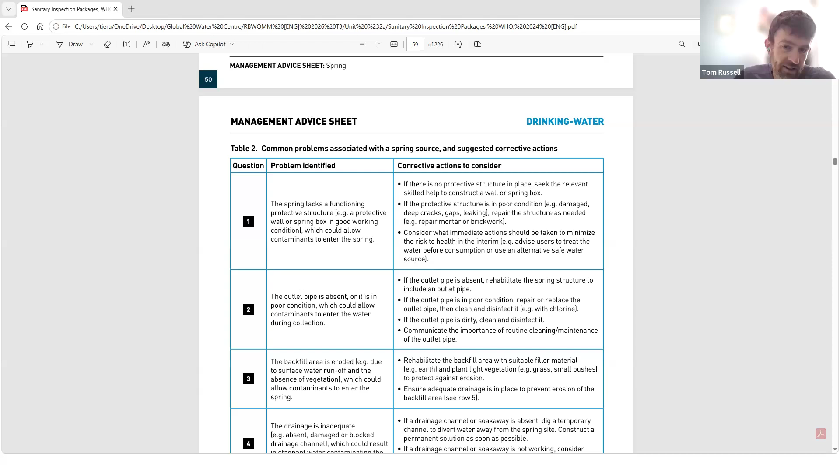Okay. Yeah, none from me. Thank you all for participating. Asante sana. Tutaona wiki baadaye. Say wiki ijayo. Wiki ijayo. Coming week, next week. Very good. Okay, great, bye-bye. Yeah, bye-bye, thank you so much.